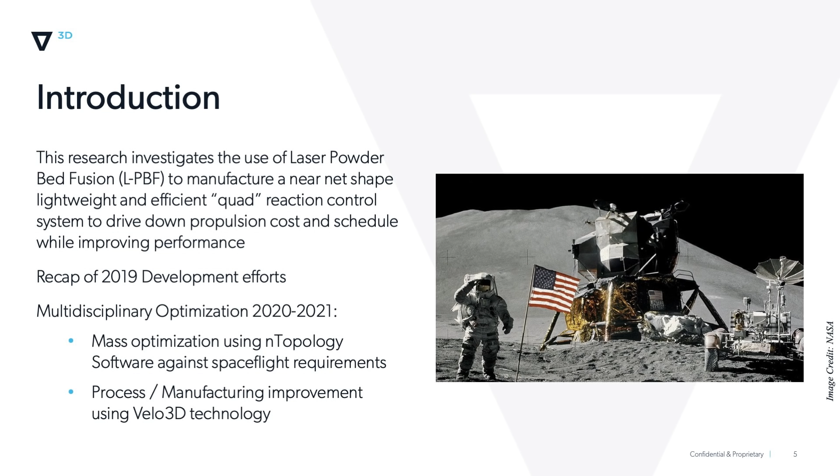So this presentation is going to recap what we did at Aerojet Rocketdyne in 2019 with additive manufacturing, but with a more traditional approach. And then our partners, Ethan at nTopology and Gene at Velo, are going to talk about how we used their advanced software and hardware to basically take our already innovative idea and iterate it and optimize it even further.

This chart is just a little background on what we did back in 1969 on the Apollo program. The lander and the spacecraft had these 100-pound storable thrusters arranged in 4 quads of thrusters around the spacecraft. So in total, there was about 32 thrusters per mission to help orient the spacecraft so it can do its maneuvering and safely get to the moon.

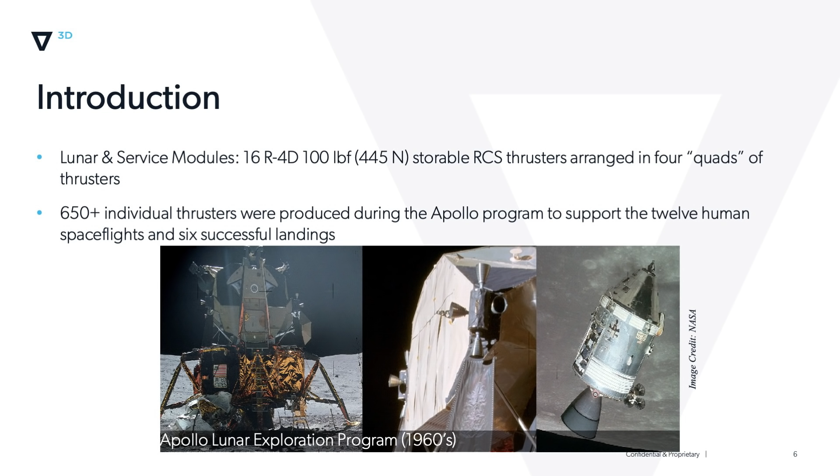Taking a step back even further, looking at the entire Apollo program, they produced over 650 thrusters to support those 6 moon landings and all the development and testing that came before it. So just the sheer number of thrusters that were produced for those 6 missions kind of led us to believe that we're onto something with looking at the reaction control system. If we can bring affordability there, then we could make an impact on any future program.

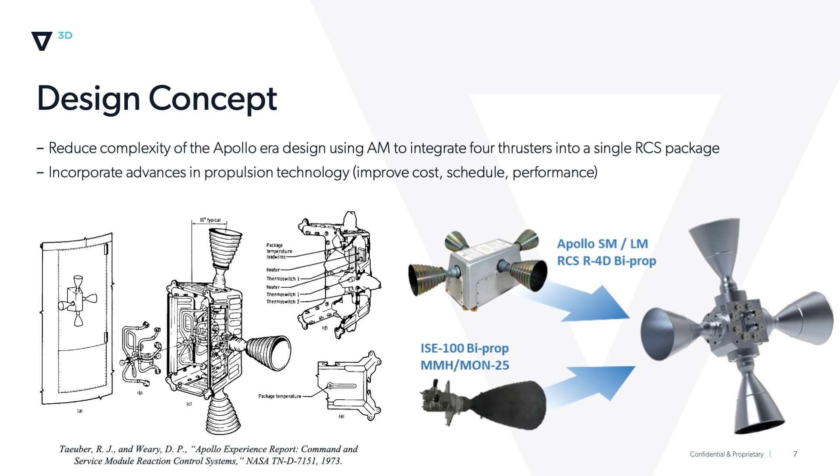So this is where the MON 25 propellant comes in, and we'll talk about that on the next chart.

Just a little background: the storable propellants we use are monomethyl hydrazine and MON 25, which is the oxidizer, and they're hypergolic. So when the fuel and oxidizer meet, they automatically ignite and combust. And that's going to give us that reliable restart capability.

They're also storable. When we talk about storable, we compare this to other rocket propellants you typically see, which are cryogenic, like liquid oxygen and liquid hydrogen. Those, since they're cryogenic, tend to boil off over long durations. So if you want something on a very long duration mission, storable propellants are key, because you don't have to do any extra cooling or processing to keep them in their liquid phase.

So like I said, MON 25, this is where the advancement comes in. This is because by adding 25% nitric oxide to regular NTO, nitrogen tetroxide, which is a typical spacecraft oxidizer, we can get that freezing point down to about negative 30 degrees Celsius. And what that in turn does is reduce all the mass and power that we need to keep the spacecraft from letting things freeze in the tanks and the lines.

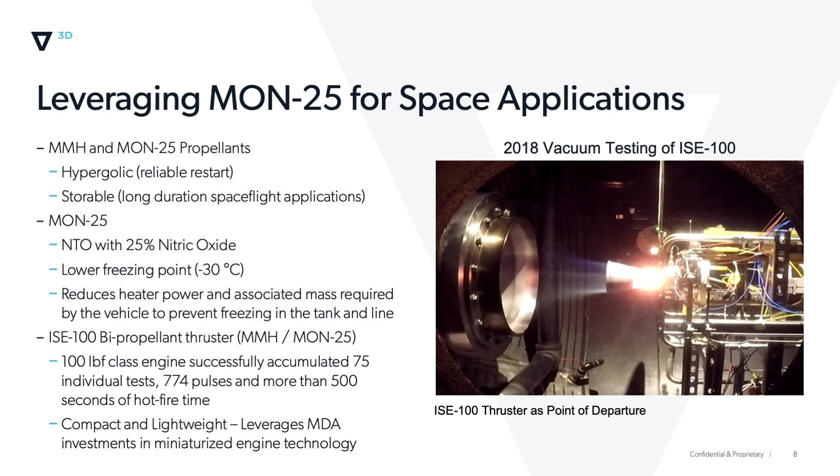Now, the problem with MON 25 is thrusters that run it usually can be unstable, which is bad in rocketry. So what we want to do with this design concept is start with a point of departure engine that could burn that propellant stably using special injector and design geometries. What we've done here, shown in the picture on the right-hand side, is we've taken that ISE-100 bipropellant thruster, which we proved could burn stably over a very long test campaign, and then expand that further into the reaction control system.

And then you could either conventionally machine or 3D print the four rocket chambers that would attach to the injector block. Since this injector block had all the complexity, all the plumbing, everything in it, that's what we really wanted to demonstrate in 2019 as a proof of concept.

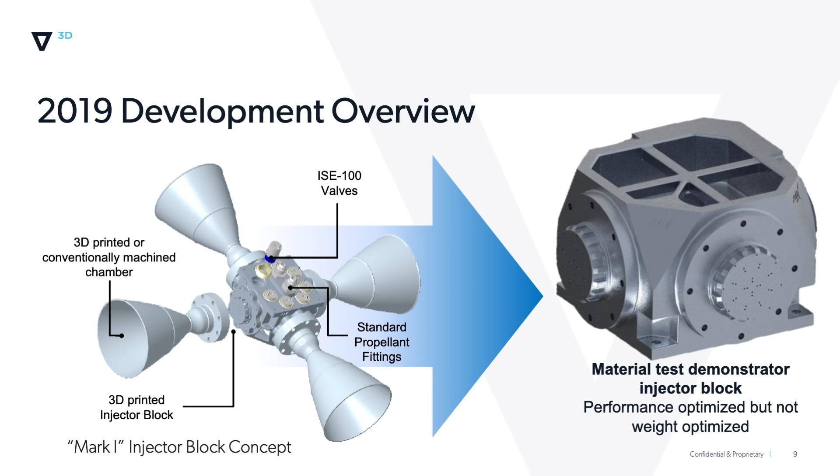So on the next chart, you can see the results from that effort. We were able to successfully fabricate the part, but since we used a more traditional approach to additive manufacturing, there were some limitations in how we built this part. As you can see in the pictures on the left and in the middle, we had to build the injector at this 45 degree angle because we had overhang limitations on our current industrial machine.

That we use at Aerojet Rocketdyne. And because of that, we had to add hard supports that would then have to be machined off later. You can see that in the middle and left-hand picture at the bottom, where it touches the build plate. We have to go back and machine off those supports, which just adds cost and mass.

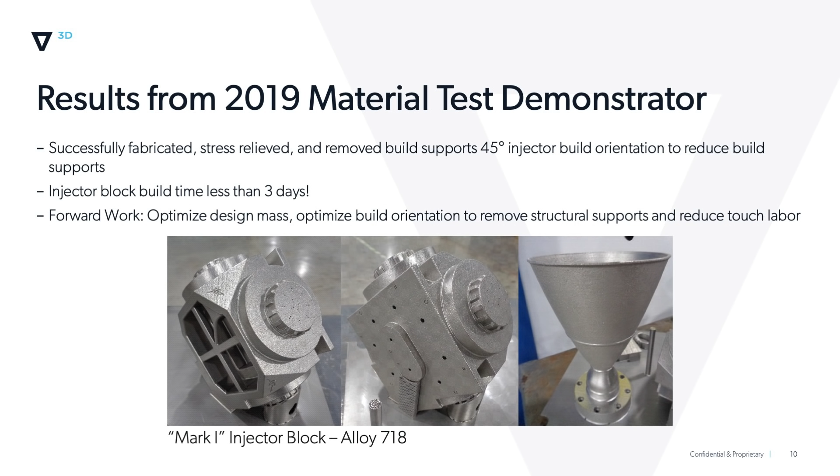The other part is we didn't really mass optimize this design. You can see in that left-hand picture, we kind of just took chunks of mass out where we could, in this blocky form, but it wasn't optimized to any of the space flight requirements. We left a lot of dead mass in the thruster. In space, getting mass out of your system is very important because it takes a lot of money, time, and effort to launch every single pound into orbit.

So that's where we turn to nTopology software to help us optimize the design, and then Velo's printing technology to build it. I'll throw it over to Ethan to talk about how we use the software to get the mass out of the part.

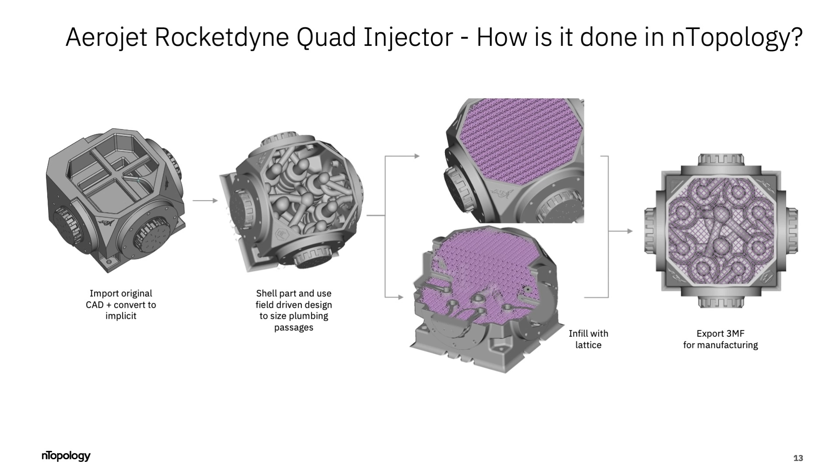What is field-driven design? That's part of our core technology. I'm going to get to our core technology here in a moment. After I do a quick overview of our technology, my colleague from the nTop Applications Engineering team, Mr. Evan Pills, he's going to give you guys a quick demonstration live in the software.

But first, a little bit more on our tech. nTop is a piece of software that enables engineers to consider design, simulation, and advanced manufacturing all under the same hood of a single workflow. Before we get into our core technology, I think it's really important for us to discuss the context in which our software sits within your organization's infrastructure.

The reason why you're using nTop in very short order is really you can create parts that would be far too complex to ever be able to model in CAD. You can simulate on objects that have lattices and other complex geometries. You can run topology optimizations and much, much more. There's a lot of power under the hood.

And it's not just meant to be a piece of software you're meant to open up and edit, et cetera. We're really trying to capture that engineering knowledge. We like to say that we're almost trying to build a visual programming language that records everything that we do to a given piece of geometry. So as you create more and more processes and workflows within nTop, you can then reuse those, share them, build intelligence with them. Ultimately, part of our vision is that we see enterprises building basically knowledge ecosystems that can then be accessed from any part of their business or any person in their business.

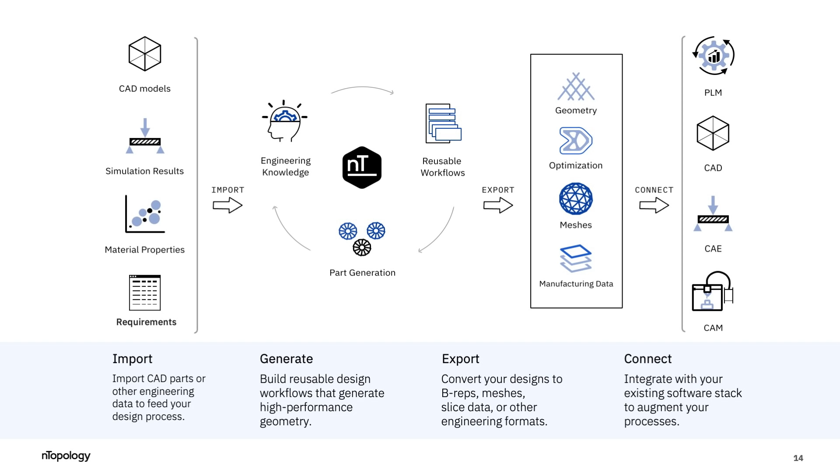So to wrap up this slide, I think the key takeaway here is that we're here to integrate with your digital thread. We are certainly not here to replace CAD. There's stuff that CAD is definitely really, really good at. We recognize that, but it does have its limitations. Those complex CAD operations that fail all the time, like your Booleans, offsetting, shelling, unioning, what have you, this is really where nTopology excels.

So to cover our core tech, here at nTop, our value proposition is really built upon 3 core technology differentiators, the first of which we lovingly call unbreakable geometry. This is our unique implicit modeling kernel here at nTop. This is the native geometry format for our software, and we're representing geometry as implicits and fields.

Because of its lightweight nature, representing as implicits and fields, your operations are going to be lightning fast. They're going to consume low amounts of memory, and they're going to be very, very efficient and really never going to fail. So no matter what input that you put in, you're not going to see any build errors or downstream errors from an operation that you did, perhaps merging, unioning, or one of those other complex operations. We build that in a really, really robust way in nTop.

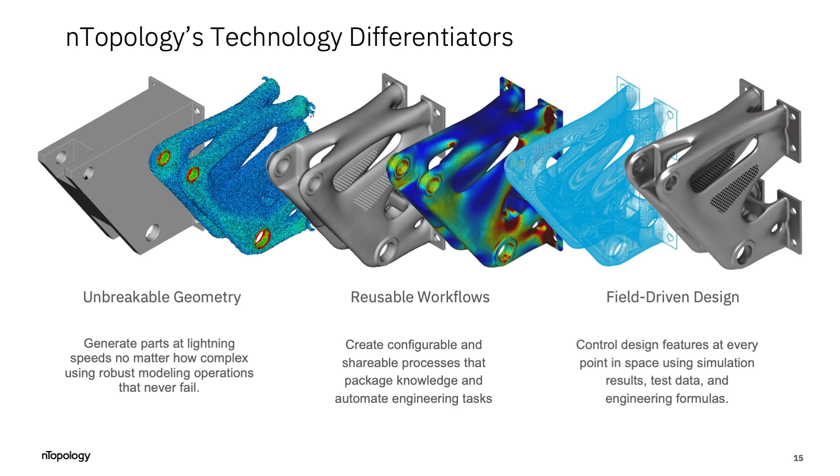So that was really a very quick technology overview of nTopology, but definitely needed before we get into the live demo. At this point, I'm going to hand it off to my colleague, Evan Pills from the applications engineering team. He's going to give you a quick demo, quick overview of the design process that we took on this part. Evan, take it away. Awesome.

Hey, thank you, Ethan. I just want to do a quick mic check while you're still there, making sure I'm all sounding good. You sound great. Fantastic. All right, wonderful.

Well, thank you for giving that quick overview. It certainly makes my job a little bit easier, but what I want to do is take you through what we did inside the software at a pretty high level, right? I'm not going to get into the extreme nitty gritty, but I want to take you through all the steps we did to end up with this really nice end part here, right?

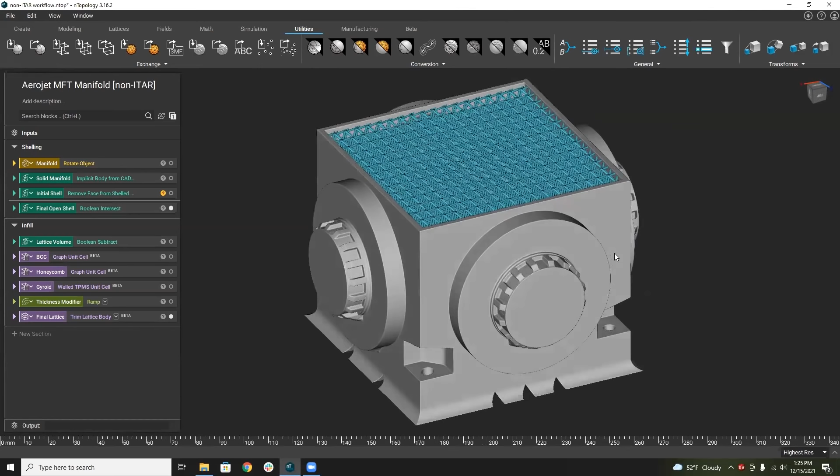We have this latticed infill geometry, it's shelled. And at the end of the day, the main thing is it was easy to do, right? That's the big thing. All right, so let's go back to the beginning.

All right, we started out from this CAD. We had the wonderful people over at Velo and Aerojet go ahead and send this over to us, right? And what we did was a little bit of defeaturing here. We filled in this volume because what we know we can do is take this, and you'll notice this is CAD data, right? Ethan was explaining implicit modeling and everything like that.

There's no faces and edges and points with implicit modeling, but we're here to play with all those tools. So we're going to start in CAD because we can design this in CAD, much easier than we could design it in other tools. Then we're going to come to nTop and do this difficult work.

So the first thing I'm going to do is I'm going to take it from CAD data. I'm going to turn it into an implicit model, right? So all of the data, the entire geometry is the exact same. It's just being represented as an implicit now.

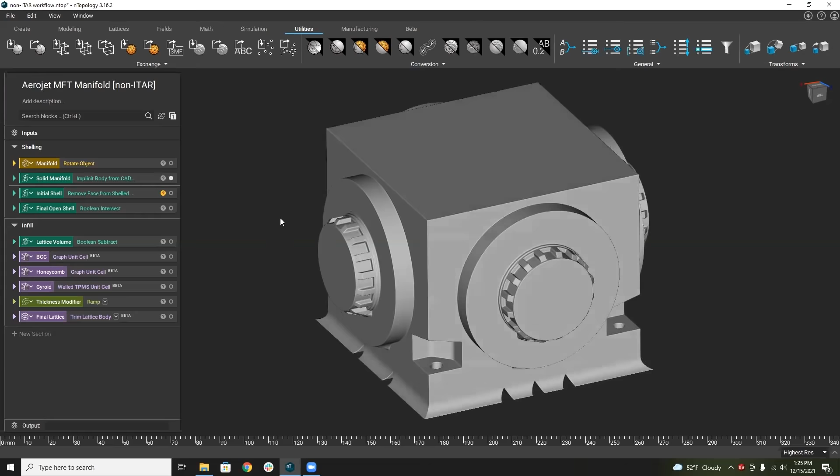And because I have it represented as an implicit, I can go ahead and throw it into our shelling operation and immediately shell this geometry without a second thought. It's a very complex shell. We have all these fluid paths and injectors and everything happening on inside of here. And in one single step, one single block over here, I'm saying, okay, go ahead and shell my part.

You know what? Why don't I remove the top face as well? And I want a 2.5 millimeter wall thickness, right? And that's a uniform wall thickness, but with that field-driven design Ethan was talking about, doesn't always have to be. So now we have this really awesome shell inside of here.

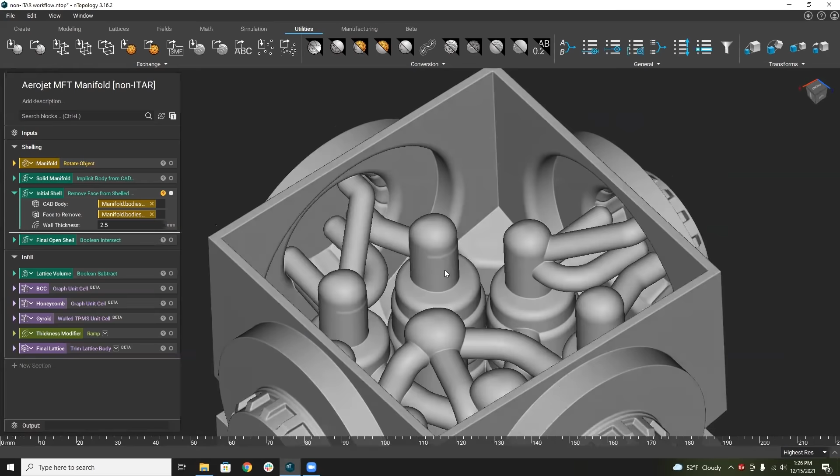Before we moved on to the lattice, I noted there are a couple areas here with sharp corners and sharper features. Why not take care of that? With implicit modeling, that's something we can do. I don't have to click on all these little edges and hope the fillets work. I'm just going to do a couple operations in corner areas, and where the injector fuel paths are, easily put in these blends to immediately get rid of stress concentration areas, or at least reduce them significantly with very little work.

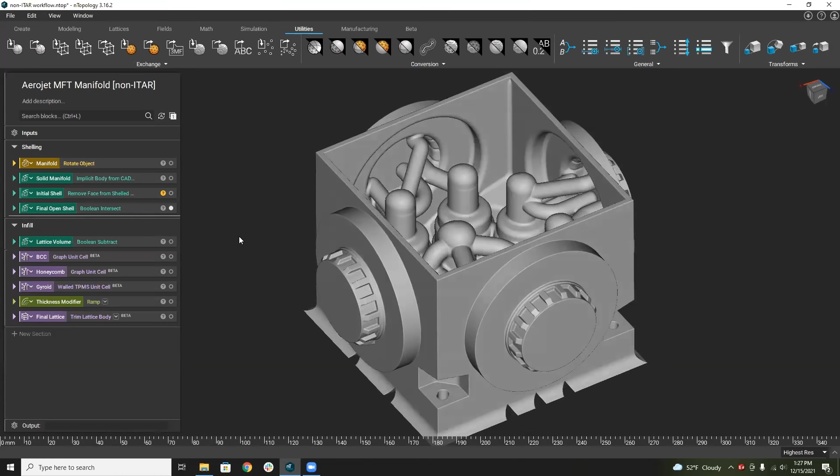Now I have this shell volume. We removed an extreme amount of mass by shelling this geometry. It's easy and quick to do, but it's not quite strong enough anymore when we just shell it like this. So what we want to do is infill this internal volume here, highlighted in blue. If we take a section cut, you can see this is the volume we initially removed. I'm going to take that volume and infill it with a lattice.

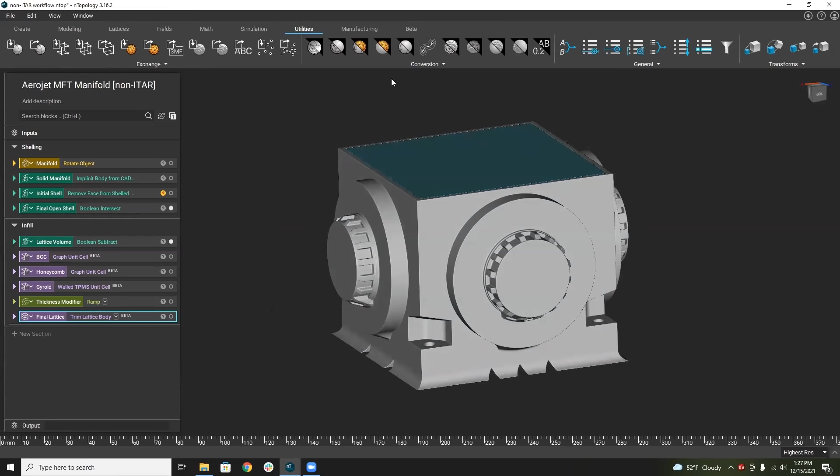That's something nTop does extremely well, is creating these sorts of lattice structures. I created this lattice structure here, and we'll put it back on the part so we can see it inside. We're able to create this lattice structure.

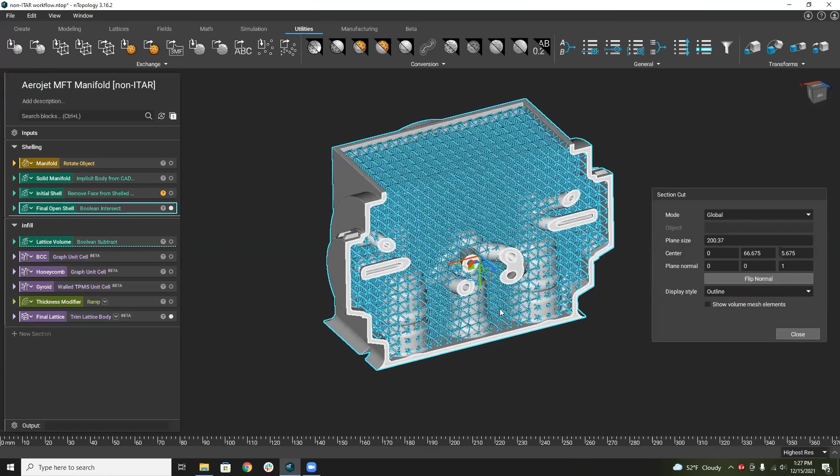This lattice structure does several things for us. One, it's stiffening our part back up. We want to work with a bit of a factor of safety here, and we actually designed to a pretty good factor of safety. We did that with this lattice structure because it gives us support in all directions—it's a periodic lattice, actually cubically symmetric, so it's supporting us the same in all directions, adding back stiffness we might have lost from the shelling operation.

It's also going to help take care of printability issues in some cases. We have some unsupported overhangs here that might cause problems, and this lattice is going to help us out with that as well. So we're using this lattice as a bit of a multitasker in this case.

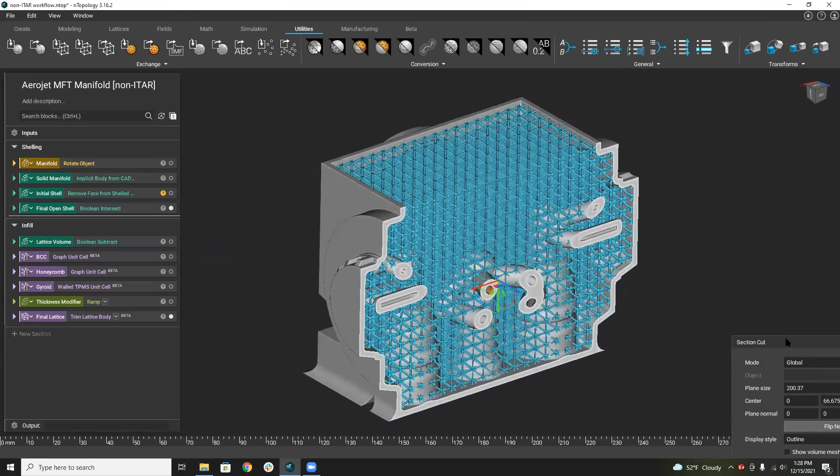But we didn't just infill this with a uniform lattice structure. If I look at this part from the top, we actually infilled it with a varying lattice structure. Something you can do inside nTop is what we call field-driven design. Ethan gave you guys an overview of that—I'm just going to show it off here. What I did was create a field to control my lattice structure geometry.

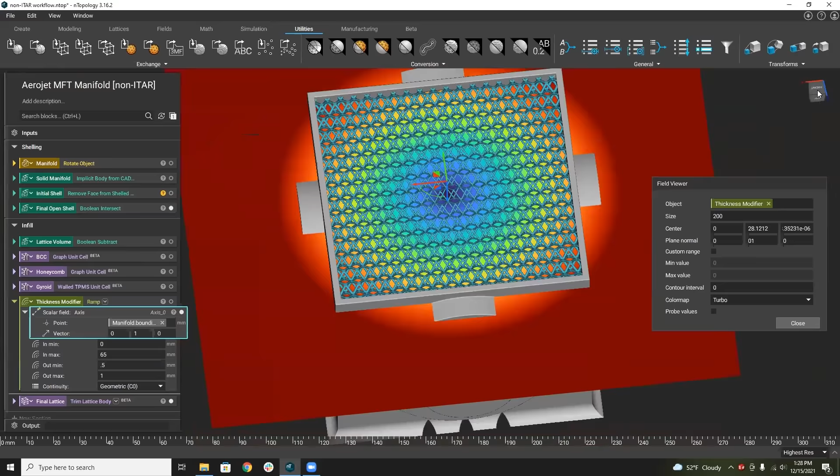So instead of a uniform beam thickness, I placed an axis which goes directly through the center of my part, and I'm using distance from that axis to vary parameters of my lattice structure. At the very center of the axis, I have a 0.5 millimeter beam, and radially, as I move away from this, I'm increasing my beam thickness, therefore increasing the strength or stiffness of my part.

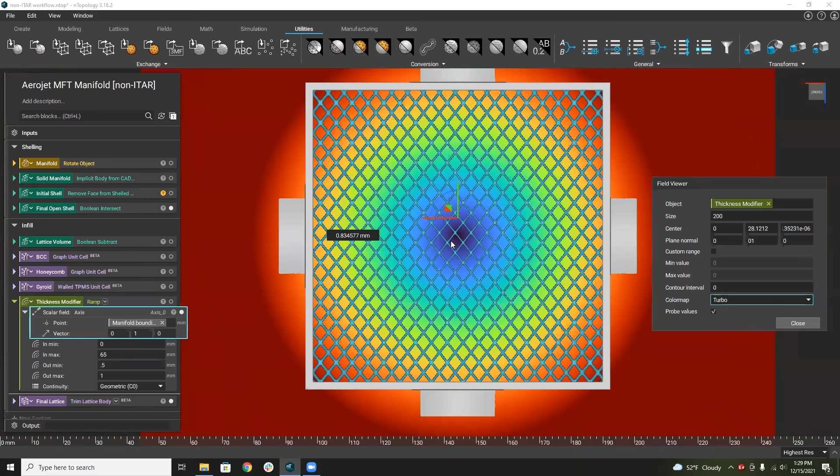Because I'm doing it radially, we're not having big effects on things like center of mass. So this is a really nice way to control our geometry, and it's a very easy thing to do inside nTop. You have a smooth transition from a nice thin beam to a nice thick beam, all applied to this lattice structure without a second thought. That's the best thing about nTop—we can do these sorts of complex things.

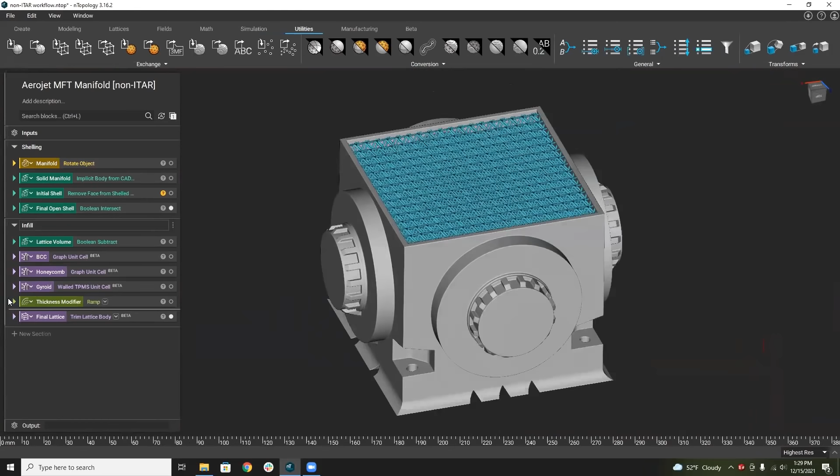And to Ethan's final point, we didn't end on this final design on our first go—we had to go through a couple of iterations. With nTop, if we want to change something, let's say—just as a drastic example—instead of a body-centered cubic unit cell, which I can highlight here, maybe we wanted to go to something more like a gyroid unit cell. That's not what we're doing in this case, but with nTop, I could just swap that out.

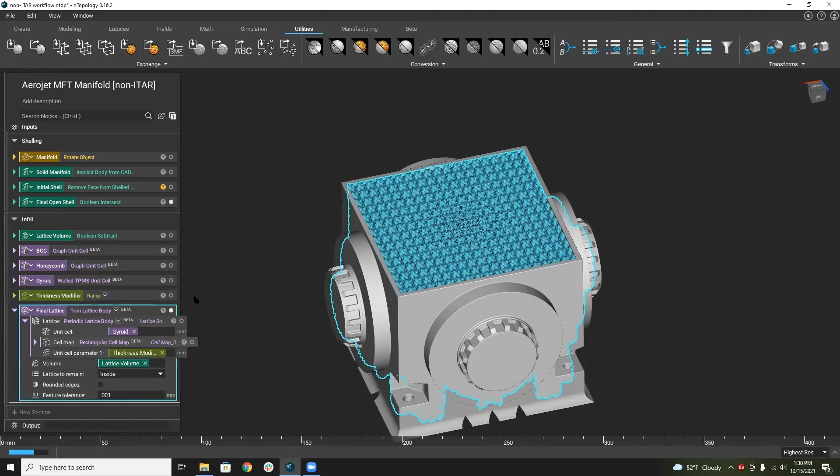At the end of the day, NTOP is going to generate a full new lattice structure following that same variance we've created here right away. You don't have to redo any of the work. So what I'm trying to show off here is that with NTOP, it's really easy to explore this design. It was very easy for us to create these geometries, explore them, and then optimize them. That is the entire goal here.

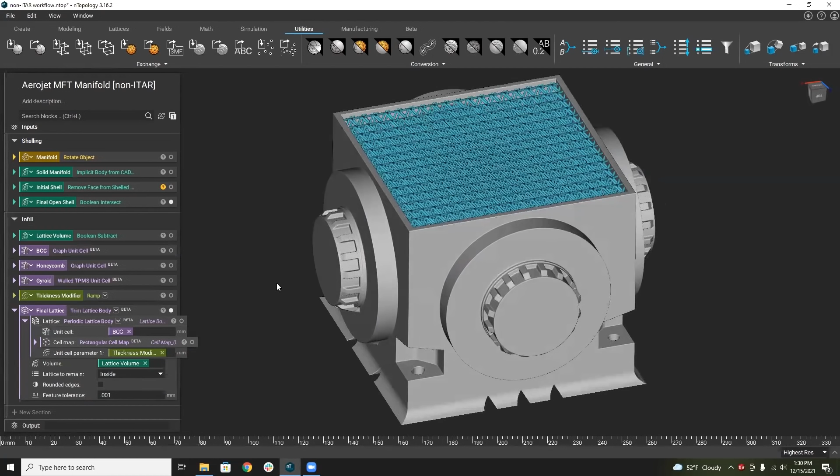That is a high-level overview of the workflow from start to finish here in NTOP. I'd love to hand it back to Ethan to give you guys a summary of the fantastic results we got out of what we did here in NTOP.

Thank you for that demo, Evan. To wrap up the NTOP section, I'm going to talk about the results. Recall that our primary goal of this exercise was to eliminate as much unnecessary weight as possible. We did exactly what we set out to do. By shelling this part and filling it with that lattice structure we just showed, we were able to achieve a 67% weight reduction in just a few design iterations. Arguably, if we had a little more time, more resources and effort to do more iterations, I'm pretty confident we could get even more weight out of there and further optimize this part.

By leveraging our implicit modeling technology, we were able to drastically reduce the design cycle from weeks to hours. So all those complex operations we talked about—shelling, latticing—you just saw how extremely quickly we can perform those operations in NTOP and do so without failure. Secondary operations like blending those lattices to the outer shell or applying variable wall thickness or variable beam thickness to your lattice are completed just as fast, and can be iterated quickly based on simulation or even real life test results.

Lastly, we talked about field-driven design—the paradigm shift in the way that we go about designing new products. By utilizing things like CFD, stress data, and other simulation data as early as possible in our design process, we can have a significant impact on the overall performance of our part or system. We can converge on those optimum performance designs quicker if we do this.

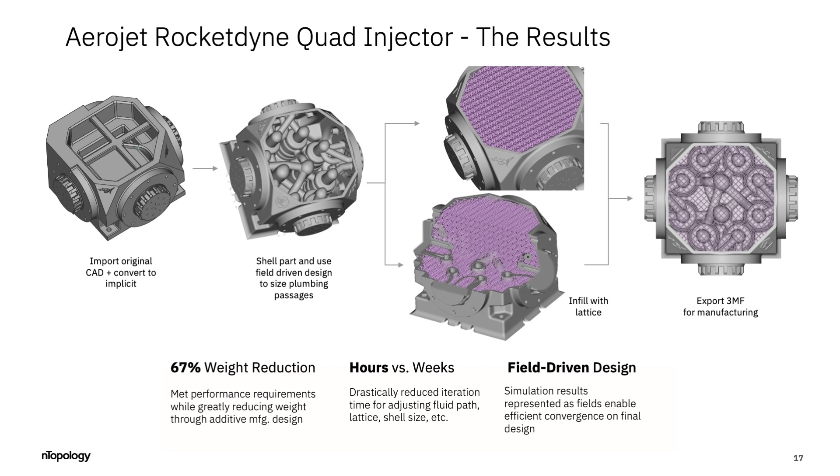Hey everybody, I'm Gene, I print stuff. My main goal here is to take all that hard work and all the really unique characteristics and optimizations that nTop and Aerojet put into this part and actually turn it into a real tangible metal component. That's what we're going to talk about today—why it's challenging to manufacture by other means, or impossible, and why it's able to be manufactured on a Velo Sapphire and our end-to-end solution.

Let's talk about this part and why it's a pain. If you can machine this part, you get a gold star—I don't know how you'd do it. You've got all these internal features that would be very challenging to reach, as well as the lattice structure that's practically impossible to machine. It's then even more challenging to print on a standard metal AM platform because of all the internal channels, the low angle closures, and these very delicate lattice features that would be subject to recoater contact and might be problematic in a traditional metal AM platform.

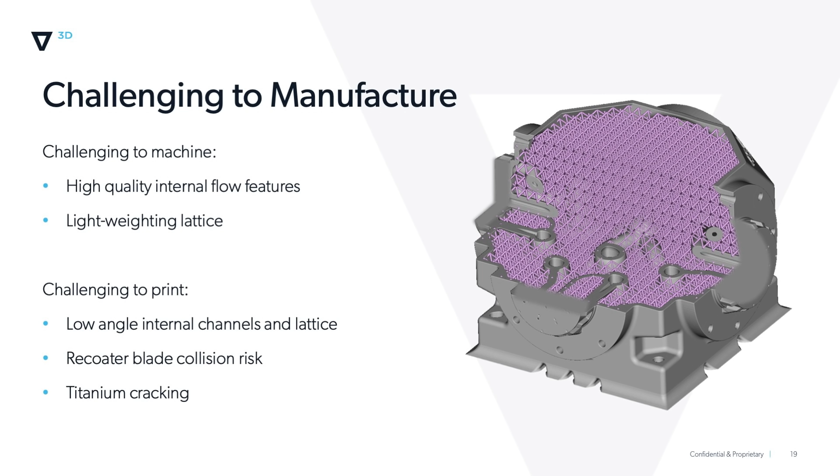There's also this big pain with printing titanium. Titanium prints very hard and very brittle, so you run into a challenge of cracking. Velo has come up with a very unique way to mitigate these stresses inside the printed material, such that we don't have to worry as much about cracking of titanium in the printing process.

So how do we do this? I get the question a lot: hey, so you can print low angles because of the process, right? Yeah. You can print low angles because of the hardware, right? Yeah. You can print low angles because of your software, right? Yeah, it's all three things, and all three things are working together in order to enable the printing that we do today.

It all starts with the Flow software. That is our proprietary pre-print software that we made to work in harmony with the other tiers of our end-to-end solution. That is where we do all the print preparation. We add support material if needed.

We can add process overrides and create a Velo print file. That print file is then loaded into the Sapphire printing machine, where the proprietary hardware goes to work and actual printing of the material occurs.

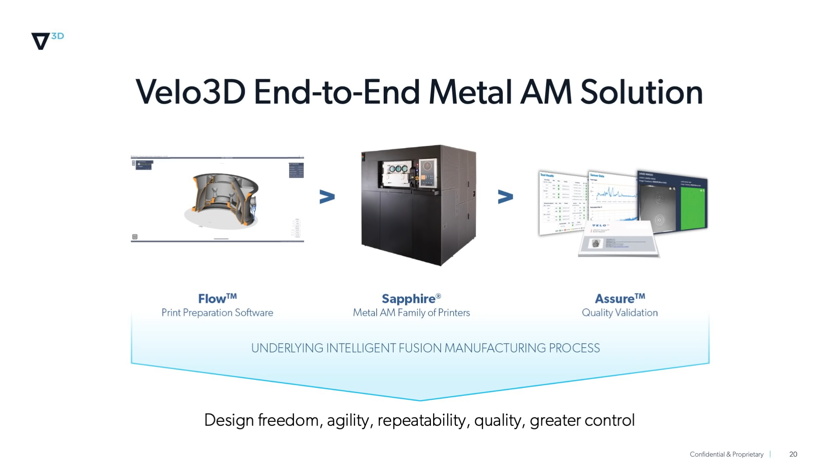That machine is loaded with sensors and gathering data, and it wouldn't mean a lot if it weren't compiled in a digestible form. That's where the Assure quality validation software comes in. It takes all the data gathered in the printing process, as well as the health metrics we capture on the machine, and delivers it in a digestible form for the end user, for quality validation and peace of mind that they received a quality part.

There are 3 different sizes in the Sapphire printer family, all using the same hardware, the same processes, the same software. Everything is very scalable from one machine to the other. It's just different sizes and different print productivity.

Each uses our 1 kilowatt lasers, and all are capable of that same in situ laser alignment we can use on any of these parts. All use an argon inert environment. We have that standard 50 micron layer thickness. The one-click calibrations I mentioned earlier are all easily done by the technician. We don't need additional hardware or sensing equipment loaded into the machine.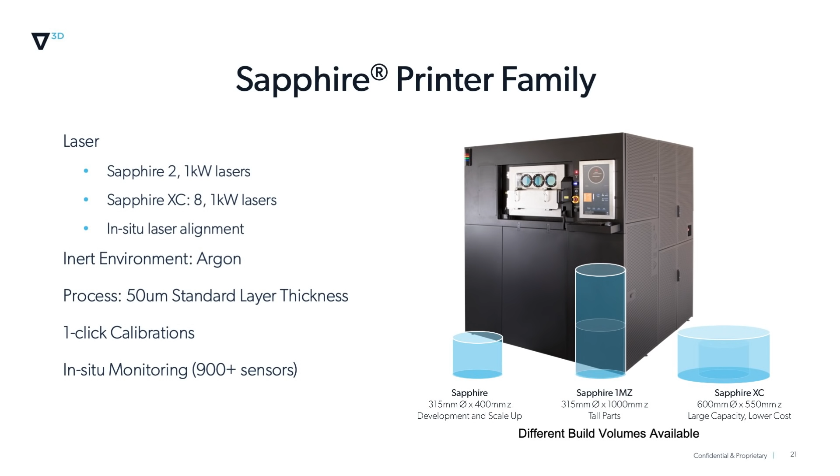This is all done as a quick check before each print, or in a weekly cadence, whatever the owner or operator of the machine can dictate. And then the in-situ monitoring from those 900 sensors are all built into each one of these machines, gathering data throughout the prints.

Ready to go right out of the gate today are a few Inconel alloys, Hastelloys, titaniums and aluminums, ready for production right now. We're printing in these today. And this part in particular that we're talking about today was a titanium 6-4 part.

Coming soon, next on deck is our GRCop-42. That's a big one for the space environment, as well as some stainless steels and aluminum 6061.

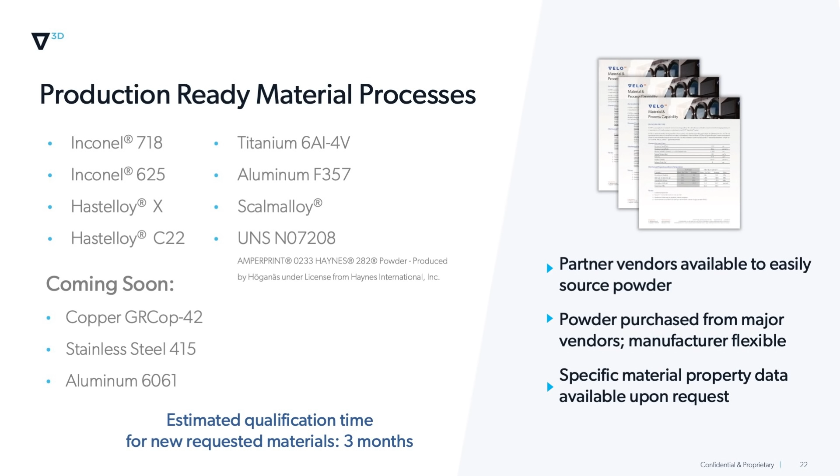Our whole strategy in material development is really driven by interest in machines. Customers that want to buy a machine on a new alloy we haven't explored yet, if it's weldable theoretically, it is metal 3D printable. So we would do that material development in parallel with the lead time it would take to deliver the machine. If you want a new material, we do it free of charge and just deliver it with the machine, so keep that in mind.

What are our specific capabilities with this low angle process? I love printing dome closures because we can get away with bloody murder. The way the shape compiles on itself, the stresses really work in our favor, and we can print some really large dome closures, well over 150 millimeters. To be honest, I don't think we've even found the true limitation in some cases of what we can print unsupported because of the diameter of the build plate.

Once we start printing these types of dome closures on the larger XC Sapphire, I think we're going to finally find our limit as to what we can print, and find the limitation of the process, not based on the limitation of the size of the printer.

Horizontal holes are another unique unsupported strategy that Velo can play with, printing up to about 100 millimeters in diameter without the need for support material on the inside. Tilting that hole opens that up to well over 100 millimeters. We can push that envelope much higher just with a slight tilt of the tube. There are other geometric concerns in mind, but the minimum thickness we can resolve there is about 0.5 millimeter, 500 micron.

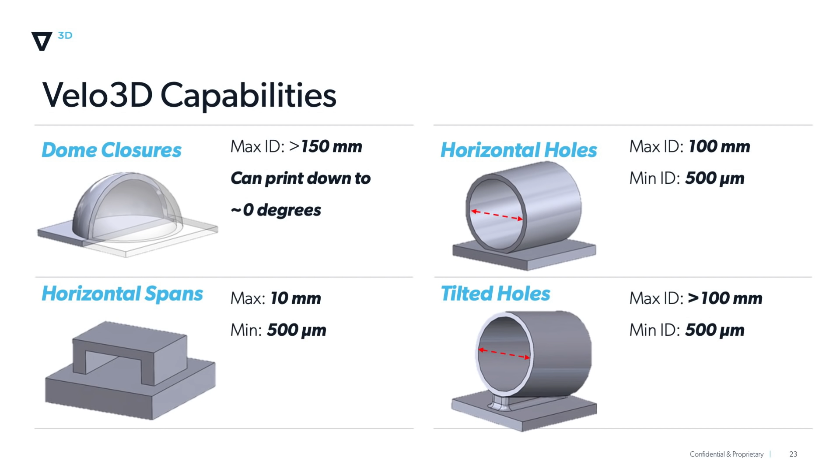For horizontal spans, if you want to print a small gap or a bridge, we can span about a 10 millimeter gap. And the smallest gap between two walls before they start fusing together is again that 500 micron mark. So I get that question a lot.

So what does your downskin surface look like? I think this is one of the best examples we have of an as-printed downskin, printed at 3 degrees. We quantified this to about 15 micron Sa across that bottom skin. What you see is what you get. This is right out of the printer. We didn't polish it, didn't do any surface treatment, no bead blasting or anything. We just cut it off the build plate, and this is what you're looking at.

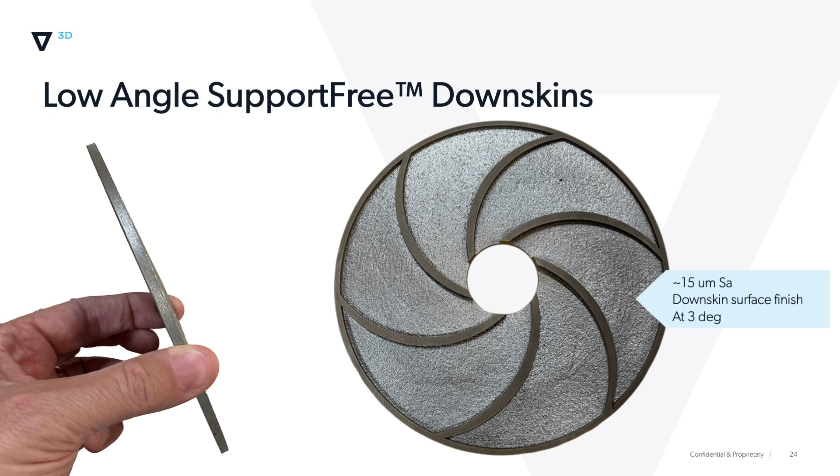So you can expect this on a low angle overhang that is operating nominally. We also get a lot of questions about the non-contact recoater and how it works.

Without going into excruciating detail, it's similar to but more revolutionary than a traditional snowplow or dump-and-smear type recoater. We are dispensing powder across the whole powder bed, and then there is a blade that comes and normalizes that surface, making it nice and flat to be addressed by the proprietary powder removal tool. That is removing all but 50 microns of powder, so what's left is our feedstock for the next layer, which is uniform at 50 microns.

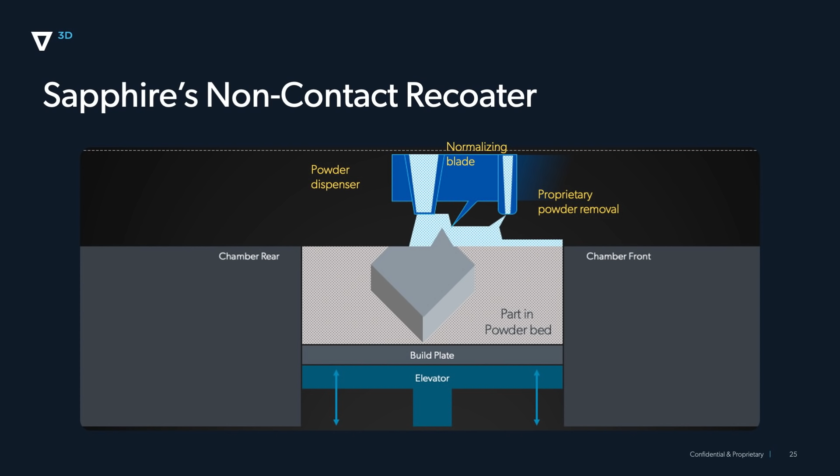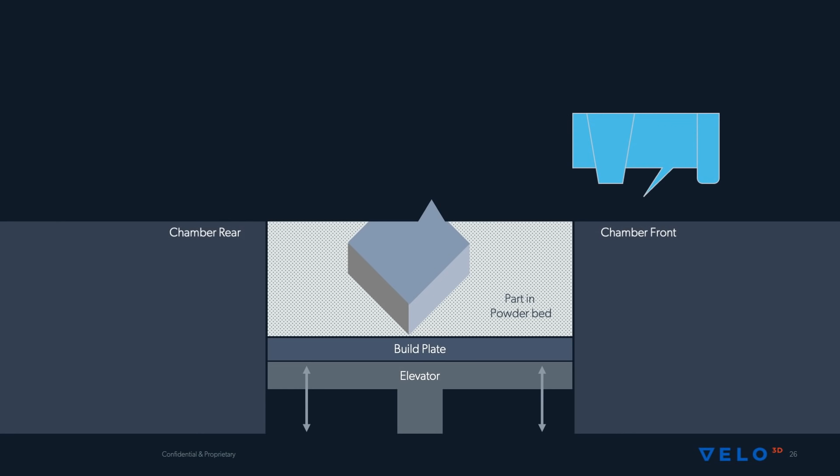We'll go through the next slides slowly and talk about what's happening here. First, the recoater is getting ready to address the powder bed. Now we're starting to dispense the powder in a thicker form than we're going to need, but then you can see the blade comes right behind it and scrapes it smooth. Then the proprietary powder removal tool removes all but that 50 microns of powder that is then left on the powder bed surface.

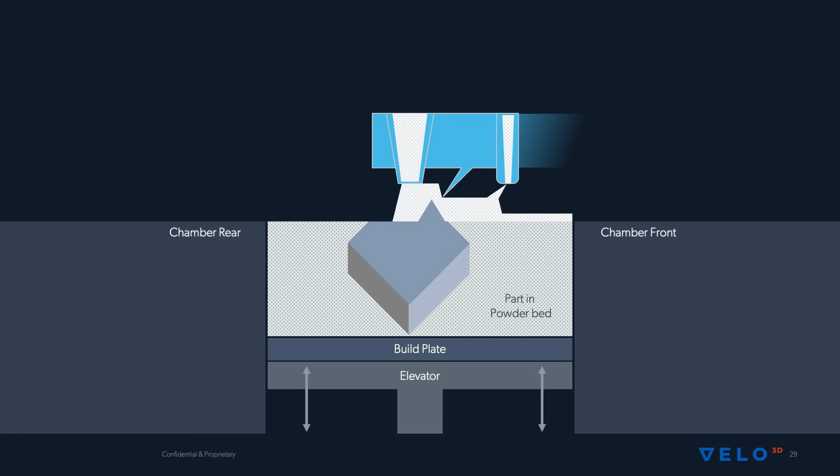What's unique about this is we can allow some protrusions to occur to a certain level, of course, but we can let the metal bulge up to some degree. That's actually tuned in with our process—we design our process to do that, and it's enabled by our non-contact recoater. So you couldn't use our proprietary laser techniques on a traditional recoating mechanism because of this.

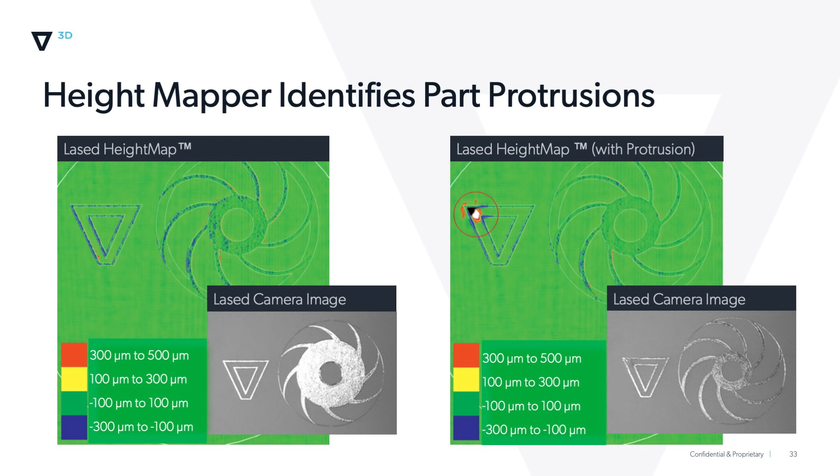In this case, the height mapper recognized the high point on the powder bed. That circle is not something we Photoshopped in—it's automatically put in by the height mapper logic, which will actually pause the machine and say, hey, I need a user intervention. Please let me know if I need to scrap this build or if we can recover. It's really advantageous to have this technology built in to avoid recoater damage, because I don't want to have to replace a recoater if I don't have to.

Onto Assure, the quality validation software I mentioned earlier. It's really compiling all this data in a digestible form. You can use it for real-time fleet tracking on any of your machines at your facility. You can look at the active build printing at that very moment, or go back in time and look at historical data. The tool health checks we talked about earlier are all recorded in Assure, and the health of the machine is reported in that build document available to the user.

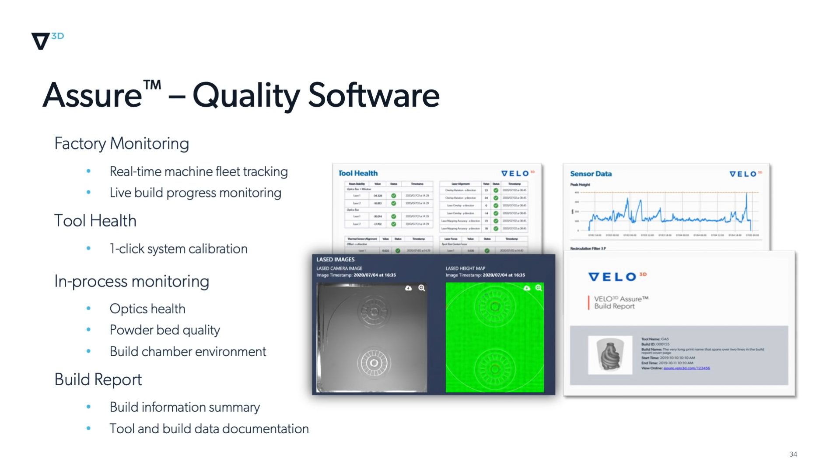The in-process monitoring data gathered throughout the build is all stored in Assure. If you want more data than just the build report at the end, you can output the raw data and really dig into the nitty-gritty of what's happening in the machine. The build report, however, is just a really concise, clean way to see that nothing went wrong in the print, or if something did, you know exactly what it is and where to look.

In Flow, the preprint software, we have recipe assignment, and this is done automatically by the software. The software is intuitive enough to recognize these geometric features and apply specific laser parameters to those areas so they print without the need for added support material, as efficiently as possible. For areas like bulk parameters, you want a high throughput laser process; for low angles, you want something with maybe lower power but the ability to resolve these low angle features without needing support material.

In this case, we have a really unique ability to recognize the LTCX file, the lattice file generated in nTopology, and apply a very specific laser parameter to that. This is all done automatically in the software.

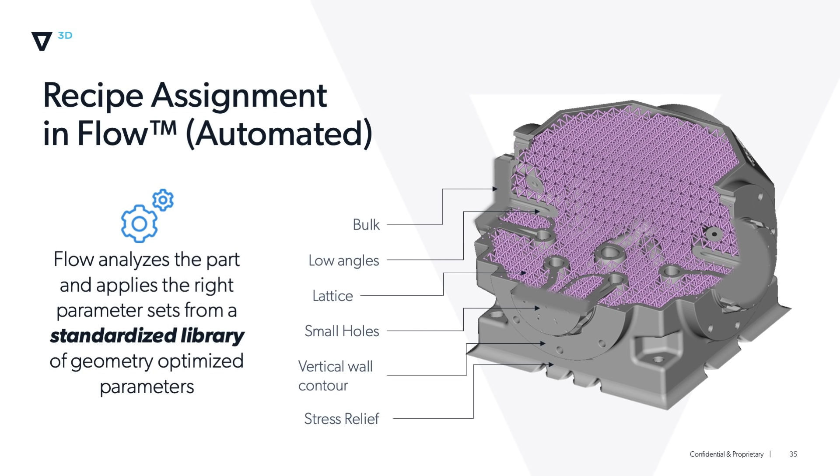One thing I will mention here is the stress relief or stress reduction. We have the ability to print this Ti-6-4 material without the incredible stress risers that exist. We have a way to mitigate the stress inside the printed material, and we aren't as plagued by cracking problems as in other materials or other printers printing the same material. Scalability is a big concern, especially when we're printing one part and want to print it many times.

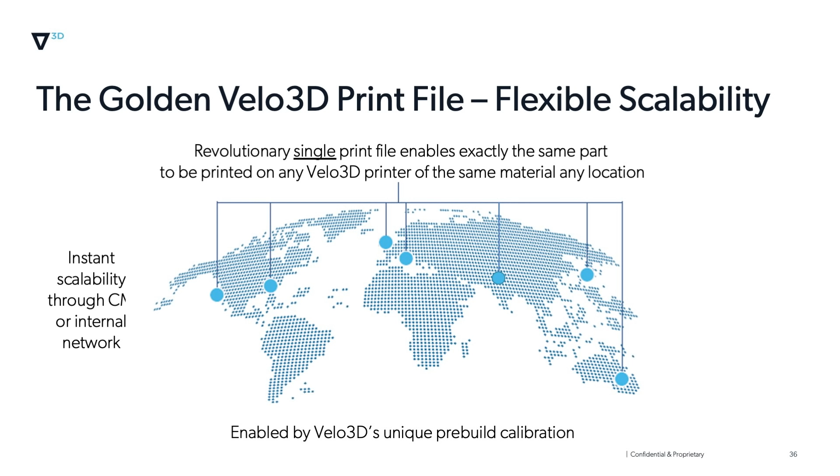I remember that James mentioned that they made 600 of these thrusters, and it would be a headache to say, I've designed this one print file, I want to print it again on a different printer. Then I'd need to make compromises and offset differences, and make a different print file for a different machine. Because Velo goes through such an excruciating qualification process, and we do such a good job with that, and we have these weekly tool health metrics checking the health of the machine, we can maintain the knowledge that this same print file that printed two weeks ago on a machine in Austin, Texas, can be used on the machine in Japan and print the same part. That's something that I think is really vital for the scalability of metal AM moving forward. It really opens up the door to what we can produce in multiple locations on multiple machines.

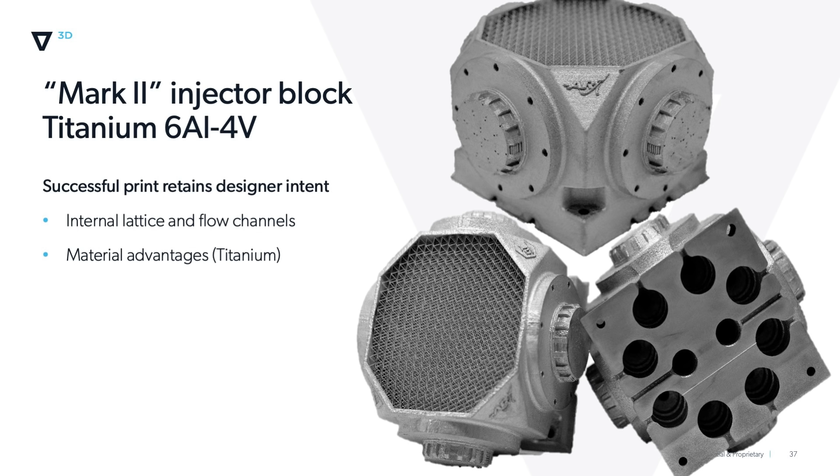So this is it. This is the printed part in the flesh. The titanium lattice was resolved very well through our printing process. The laser parameter applied to that is different than all the others on the part. The internal passages were supported by these lattice features, so we didn't need to add any support material on the inside, and again, we didn't have the problem with cracking of the titanium.

So with that, I'll hand it back to James, and he'll take us across the finish line.

Thank you, Gene. So I think what we've shown here today is that if we leverage these advancements we've made over the last five decades in additive manufacturing, with software and hardware, we can really take that and interject affordability and even improve upon the performance of the way we used to build parts in the past. What's exciting for me is that we were able to actually demo this proof of concept, and now I'm pretty excited to start taking this and trying to bring it into actual testing, actual hot fire testing, so we can then put it hopefully up into space.

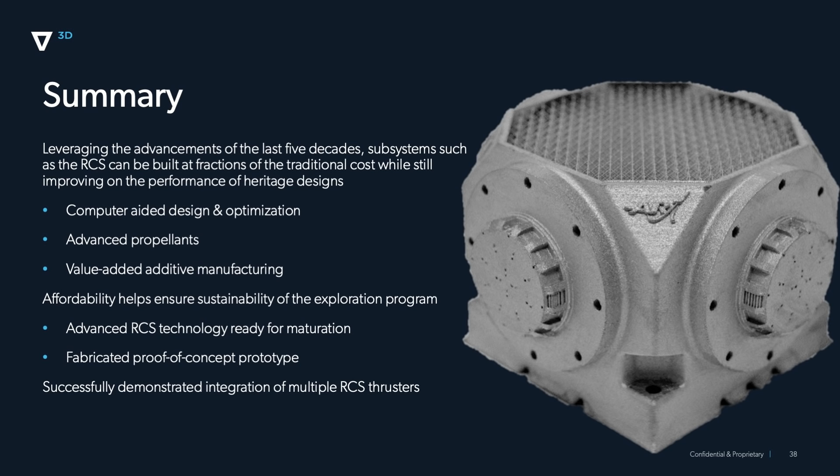So with that, we're going to open it up to questions and answers now. Gene, Ethan, and myself will be happy to take your questions.

Absolutely. Thank you, everyone. Great job presenting today.